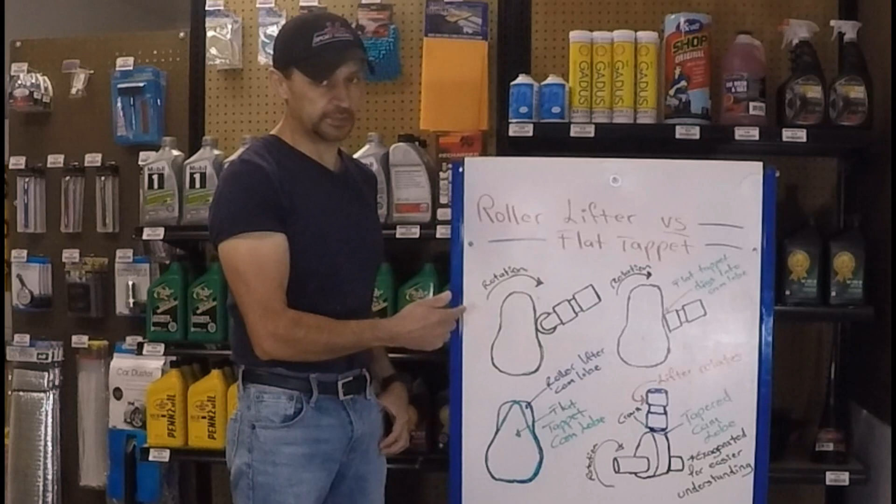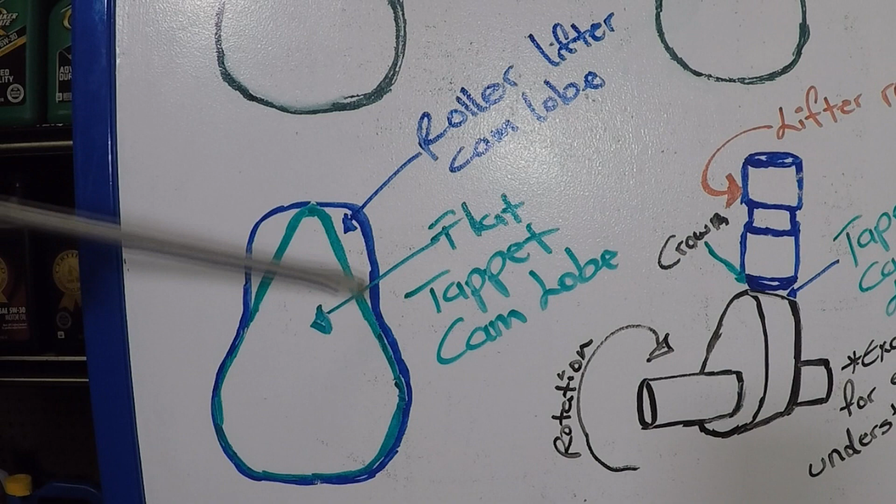In this image that I drew, the blue represents a roller camshaft lobe profile and the green indicates a flat tappet camshaft lobe profile. As you can tell, the roller camshaft lobe has a much more aggressive pattern. It can stay open for a lot longer than the flat tappet. And when a valve can be opened faster and longer, more air flows in and out of the cylinder. Now that you can see the difference in the two designs, I'm going to show you two drawings that will help you see how a flat tappet cam would not work on a roller cam profile at all. Let's take a look.

So what we have here is a roller camshaft profile, so we can really see why a flat tappet wouldn't work. Here's a roller lifter, and the reason for the name is because it has a roller that rides over the camshaft lobe. This cam profile can be as aggressive as needed because the roller will go over regardless of how it's shaped. It could even be an inverted profile, meaning this part could be wider than the part next to the camshaft, and the roller will still ride over it just fine.

But now let's take a look at what would happen if we put a flat tappet lifter on a roller cam profile. Here's the close view. As you can tell, on an aggressive cam lobe design like this, the flat tappet would dig into it and destroy the camshaft. It wouldn't take very long for both parts to destroy one another because the profile is so aggressive - it's almost vertical versus what it needs to be, like I showed you in the other drawing, something not as steep.

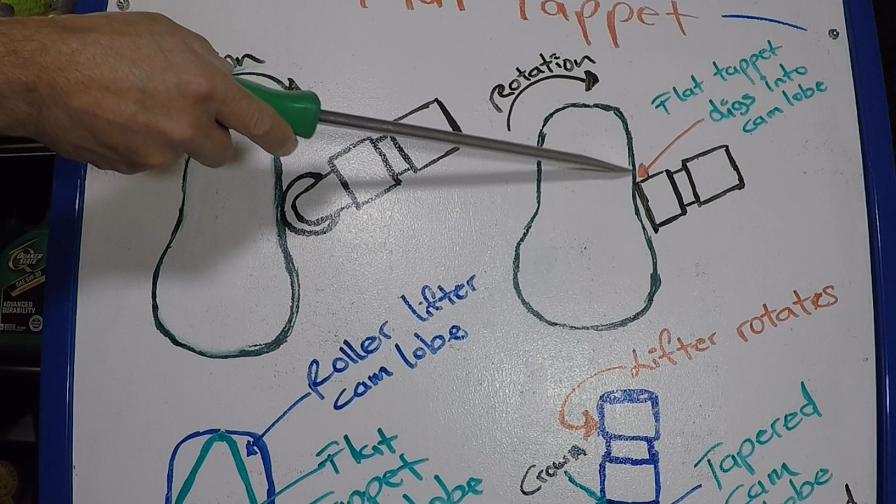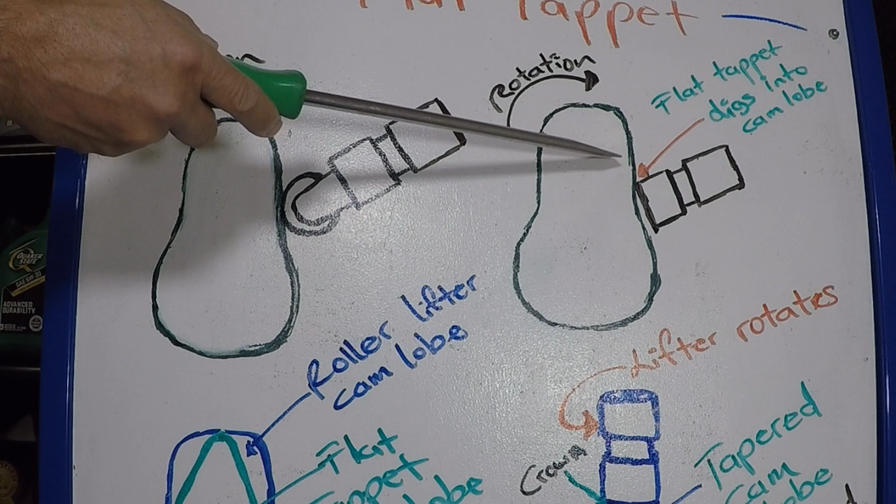This would enable the flat tappet to ride just fine. And because of that restriction of the flat tappet design, the camshafts cannot be as aggressive as the roller ones. Now let's take a look at another drawing when it comes to the flat tappet one.

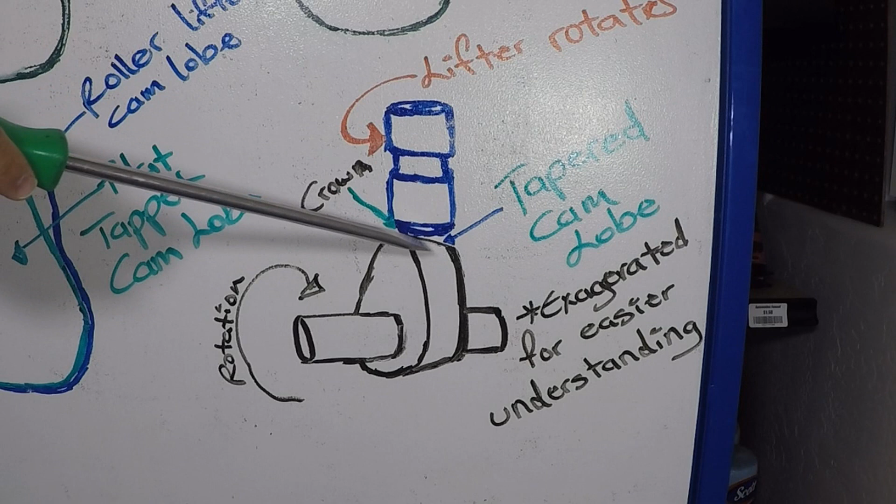I drew this exaggerated so it's easier to understand. In a flat tappet camshaft, the cam lobe is tapered, it's not completely flat, and the lifter itself has a crown. Just by looking at them, the lifter appears flat and so does the cam lobe, but they're not. Because of that slight crown and taper edge, as the camshaft rotates, the lifter spins, and that helps to minimize wear and maintain good lubrication between the two parts.

That brings up another thing to consider with flat tappet camshafts: each individual lifter and cam lobe develop their own wear pattern. That means if you're tearing down your engine for inspection or anything like that, you need to make sure each lifter goes back to its original location so it matches the camshaft lobe, because between the two they have developed a unique wear pattern. If you put this lifter somewhere else, the wear pattern is not the same and eventually it's going to destroy the cam lobe, or both will destroy one another.

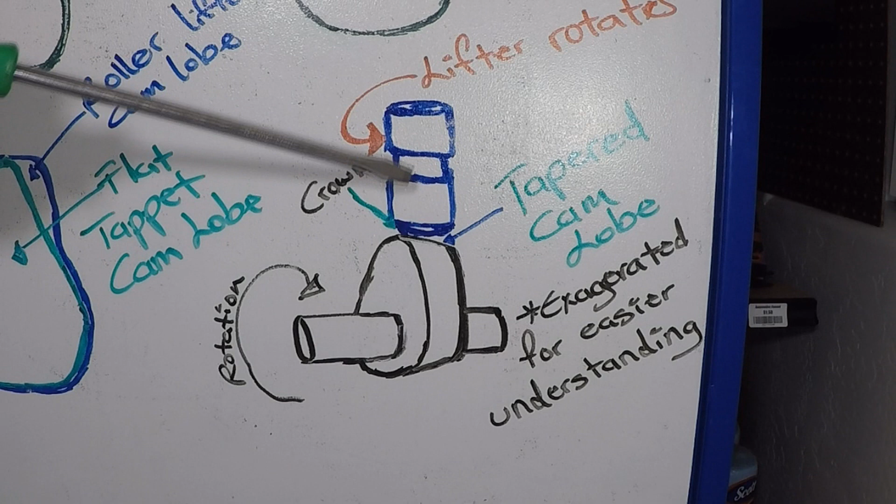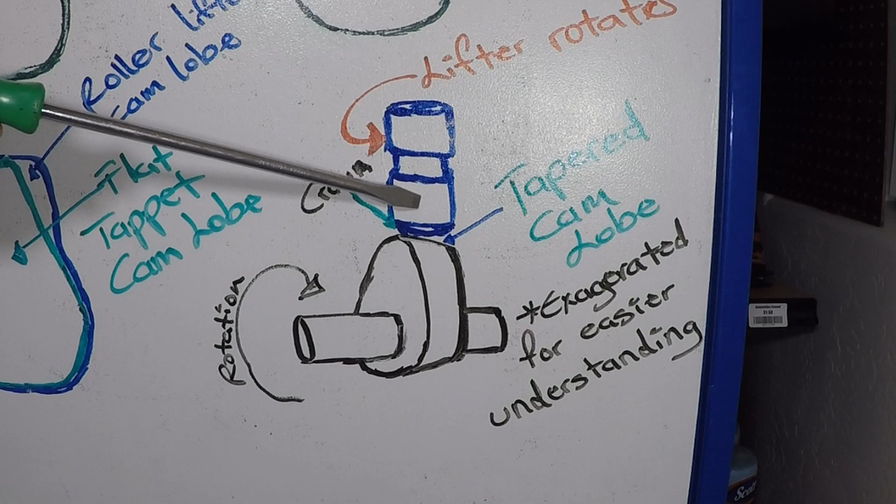Now this problem doesn't exist on the roller ones. You can reuse roller lifters, you can put them wherever you want, provided the roller is in good shape. You can put a new camshaft and reuse your lifters if the roller is still in good shape. You cannot do that with a flat tappet one. When you install a new camshaft, new lifters need to be installed, and when you remove your flat tappet camshaft, each lifter needs to go back to its original location, otherwise you'll be replacing that camshaft within 5,000 to 10,000 miles, most likely.

So there you have it. Now you understand why a roller lifter is more desirable. Because of its design, it can enable an engine to move a lot more air in and out of the cylinders, and of course that translates into more horsepower. And you can never have enough horsepower.